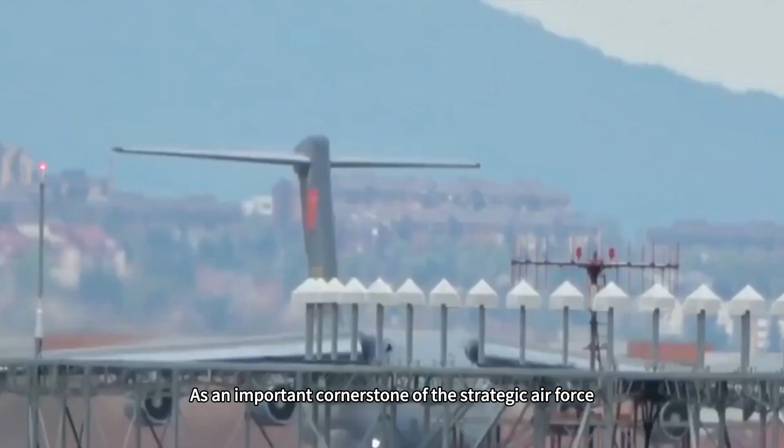As an important cornerstone of the Strategic Air Force, the emergence of the Y-20 not only makes up for the shortcomings of the Chinese Air Force, but also, in the international arms trade market, has let the whole world see the power of China.

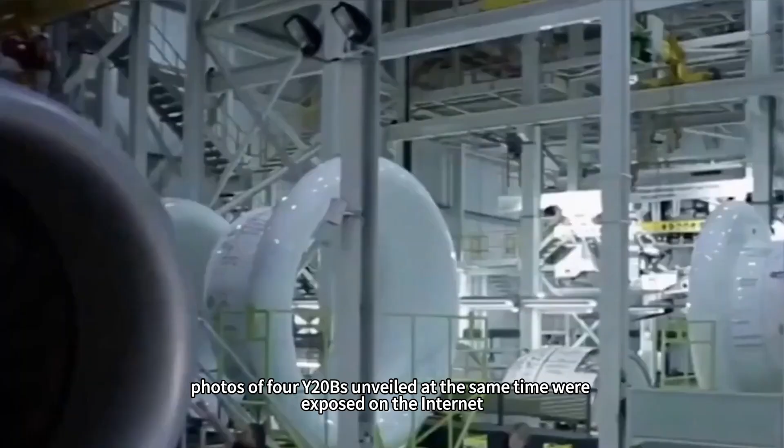And just recently, photos of four Y-20Bs unveiled at the same time were exposed on the internet, triggering heated discussions among netizens. So, what are the highlights of the Y-20B? How strong is the Y-20 after the Turbofan-20? Can China's aviation engines really already be made at will?

Speaking of the Y-20, in fact, as early as the 1990s, China developed the idea of a large transport aircraft, but at that time national strength was limited and the technology was not mature, so it could only be temporarily shelved. But as China's comprehensive national strength steadily increased, the development of large transport aircraft was formally put on the agenda. In 2007, the Y-20 project was successfully launched and entered the development phase at Xi'an Aircraft Industry Corporation, XAIC.

Under the joint efforts of researchers, in January 2013, the Y-20's first flight was successful, and in 2016, it was formally installed in the Army, named Y-20, codenamed Kunpeng. Don't look at the Y-20's chubby appearance; thanks to its excellent aerodynamic shape and advanced flight control system, its flight performance is quite excellent.

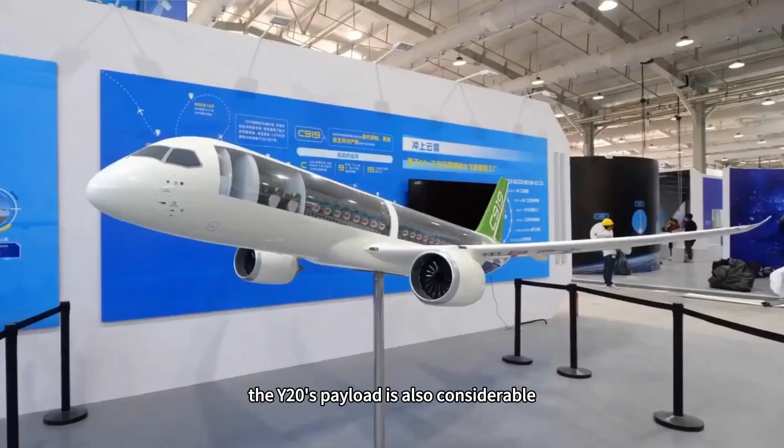As a large multi-purpose transport aircraft, the Y-20's payload is also considerable, with a maximum payload of up to 66 tons, which exceeds the 40 tons of the Russian Il-76 and is comparable to the US C-17 transport aircraft. In addition, the Y-20's range is also considerable, up to 7,800 kilometers under full load, capable of intercontinental transit. Therefore, the launch of the Y-20 marks China as one of the few countries in the world that can independently develop a large transport aircraft.

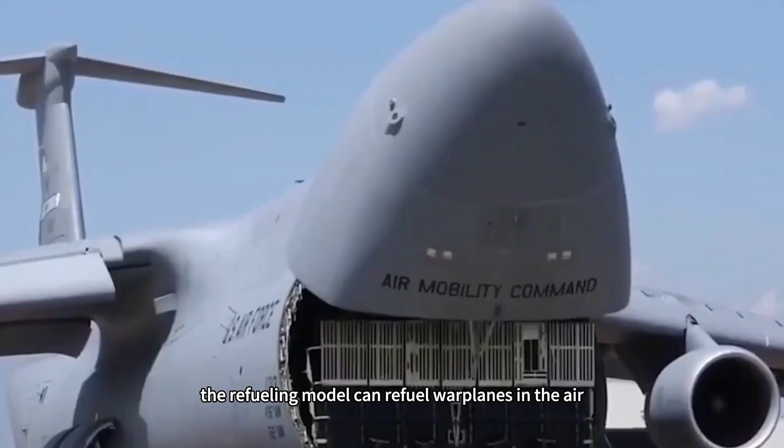Of course, as a large multi-purpose transport aircraft, the Y-20's use is not only limited to transportation. Thanks to its excellent performance, a variety of models can be derived from the Y-20 to perform various missions. For example, the refueling model can refuel warplanes in the air, significantly increasing the combat radius of the Chinese Air Force. Another example is the early warning type, which can carry radar systems and act as an airborne radar station to provide early warning and command capabilities for the Air Force.

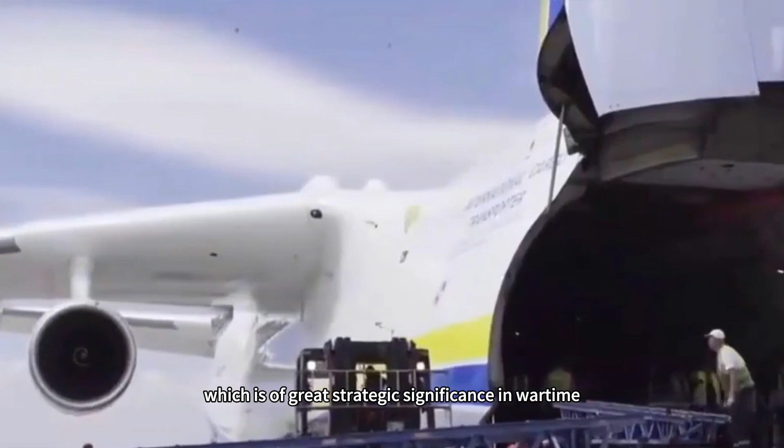The transportation type is even simpler, and can be used for rapid deployment of troops or transportation of weapons, equipment, and supplies, which is of great strategic significance in wartime. In addition to these derivative models, the Y-20 is constantly being upgraded and improved. A photo of four Y-20Bs unveiled at the same time was recently exposed on the internet, which aroused widespread concern. So, what are the highlights of this Y-20B?

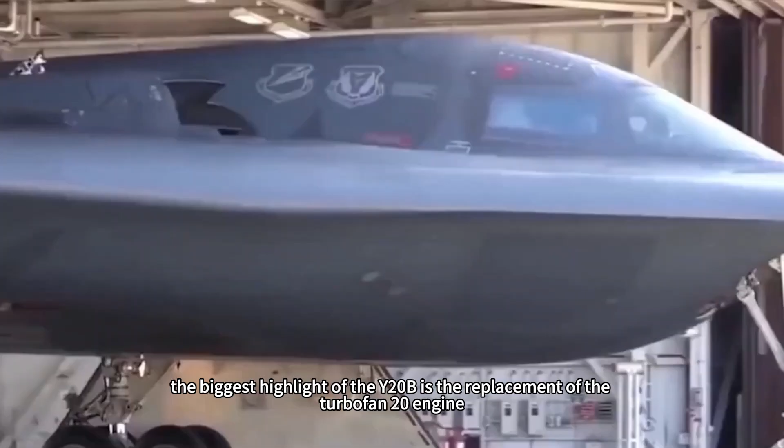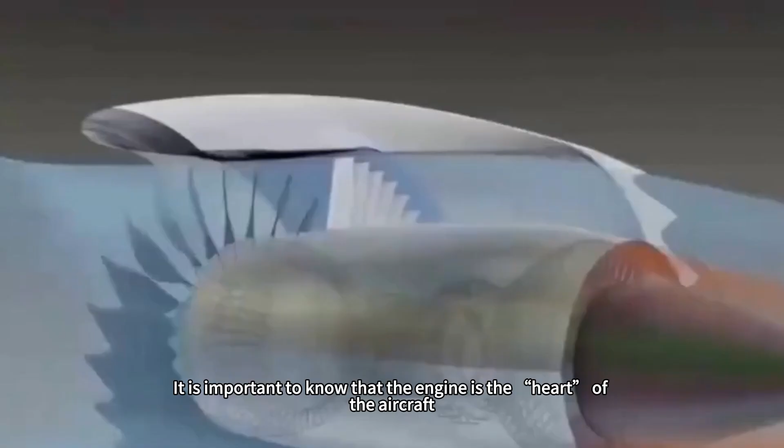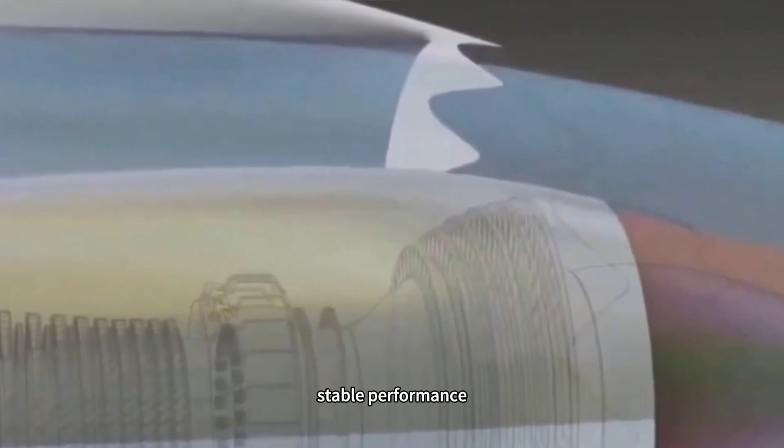In fact, compared with the early Y-20, the biggest highlight of the Y-20B is the replacement with the Turbofan-20 engine. Some people may ask, what is so rare about the engine? It is important to know that the engine is the heart of the aircraft. An excellent engine is crucial to improving the performance of the aircraft. Prior to this, the Y-20 used the D30KP2 engine imported from Russia. Although this engine technology is mature and its performance stable, the shortcomings are also very obvious: high fuel consumption and limited thrust. This not only limits the Y-20's load and range, but also affects its flight performance.

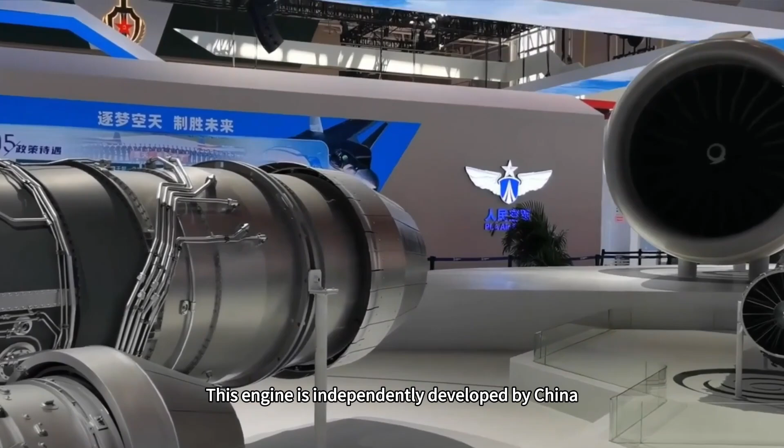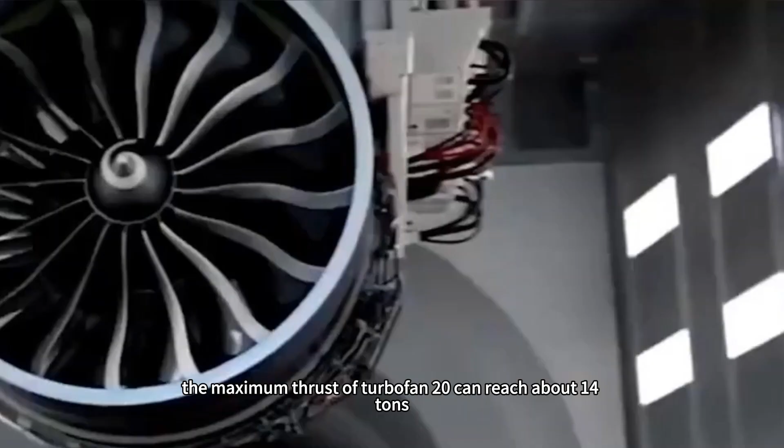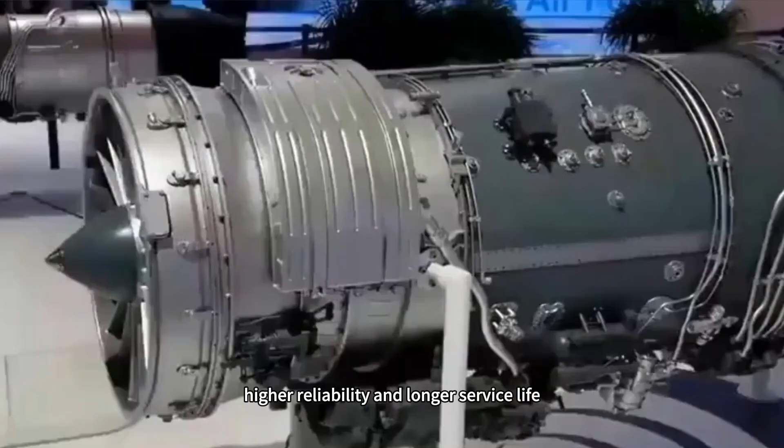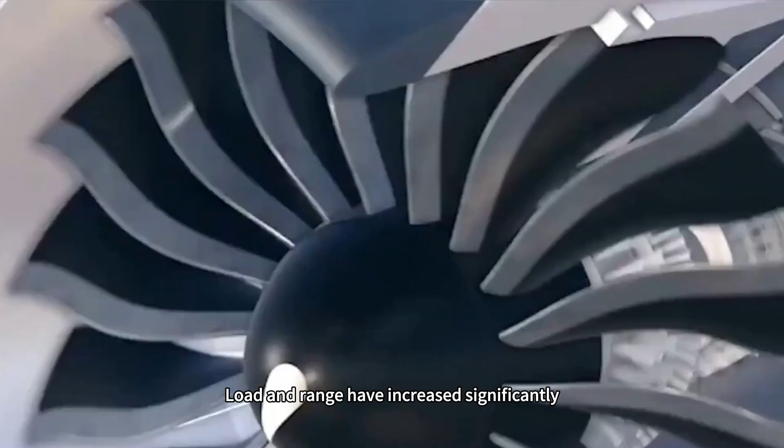The emergence of the Turbofan-20 engine, on the other hand, has perfectly solved this problem. This engine is independently developed by China and has significantly improved in thrust, fuel consumption, reliability, and other aspects. According to public information, the maximum thrust of the Turbofan-20 can reach about 14 tons, which is about 20% higher than that of the D30KP2. Moreover, it has lower fuel consumption, higher reliability, and longer service life. It is precisely for this reason that the Y-20B, after being retrofitted with the Turbofan-20, has made a qualitative leap in performance. Load and range have increased significantly, and the flight performance is also more excellent, which means that the Y-20B is able to carry out more complex missions and has a stronger strategic delivery capability in wartime.

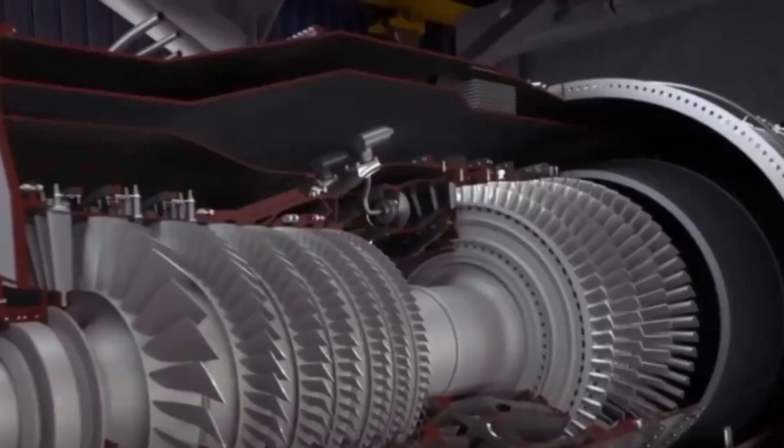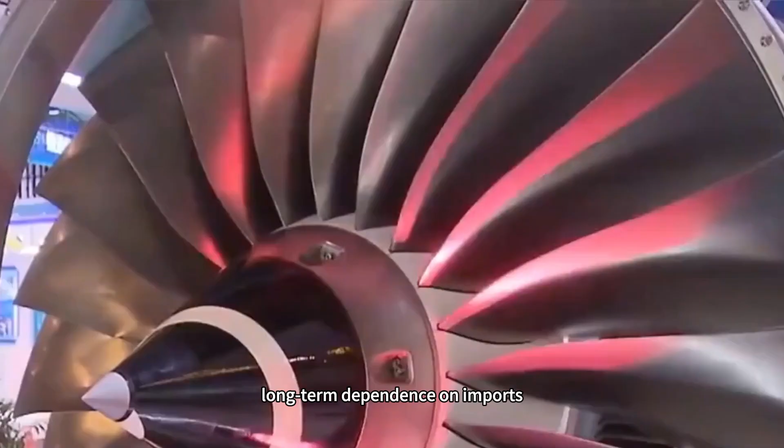Moreover, the mass production of the Turbofan-20 also marks a major breakthrough in China's aviation engine field. The aviation engine has always been China's shortcoming, with long-term dependence on imports, which seriously restricted the development of China's aviation industry, and the successful development and mass production of the Turbofan-20 breaks this bottleneck, giving China a leap from nothing to something in the field of aviation engines.

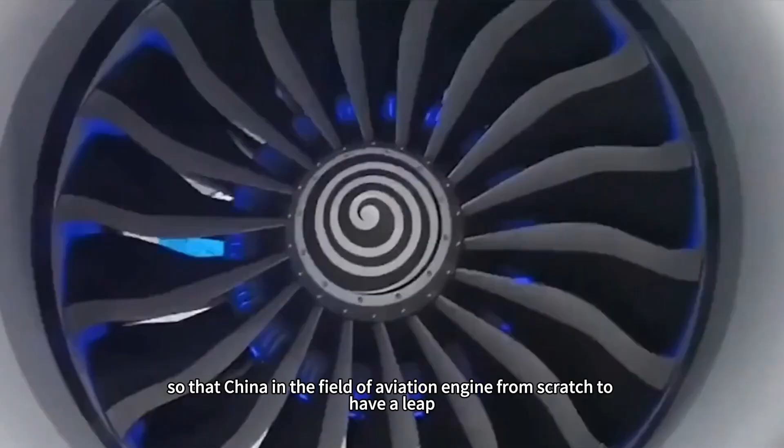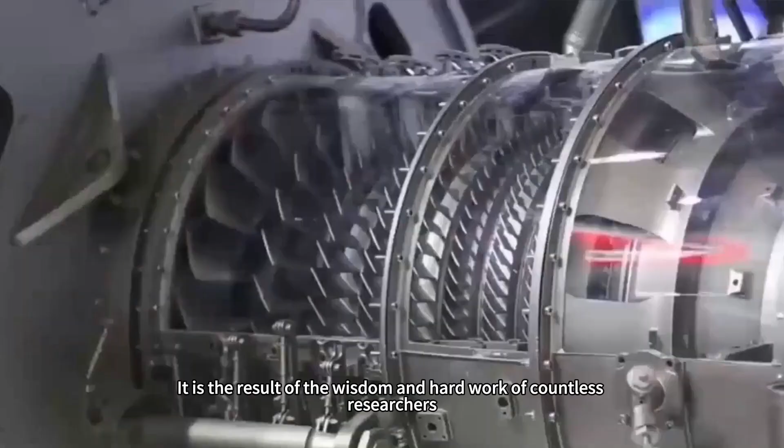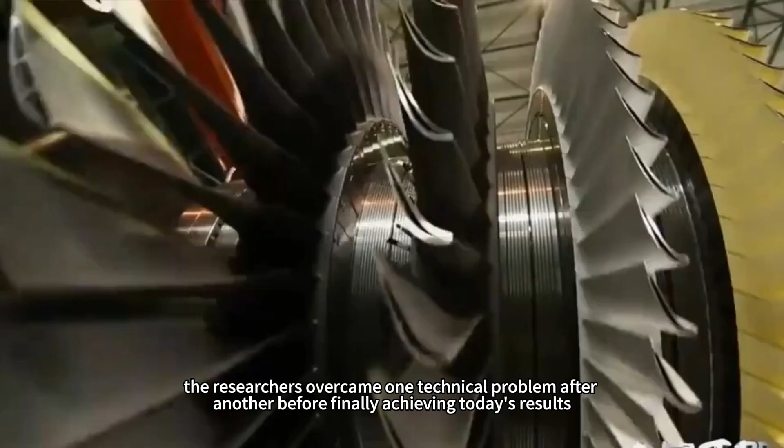Of course, the successful development of the Turbofan-20 did not happen overnight. It is the result of the wisdom and hard work of countless researchers. During the development process, the researchers overcame one technical problem after another before finally achieving today's results. And the successful development of the Turbofan-20 has also laid the foundation for the development of China's aero engines.